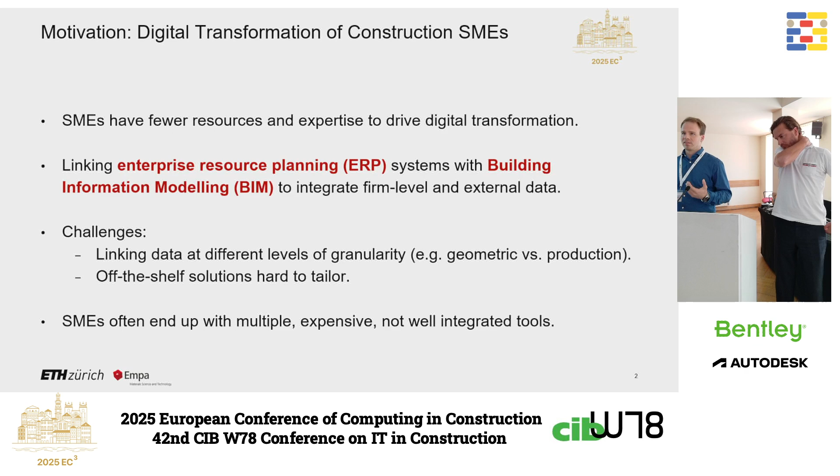And there's been some work on this, but there are still some challenges linking this data at different levels of granularity, and off-the-shelf solutions are often very hard to tailor to the custom processes of the SME. So they often end up with multiple expensive, not really well integrated tools. In this project, an Innosuisse funded project, Félix, a facade company, approached us to look into this problem and develop some solutions.

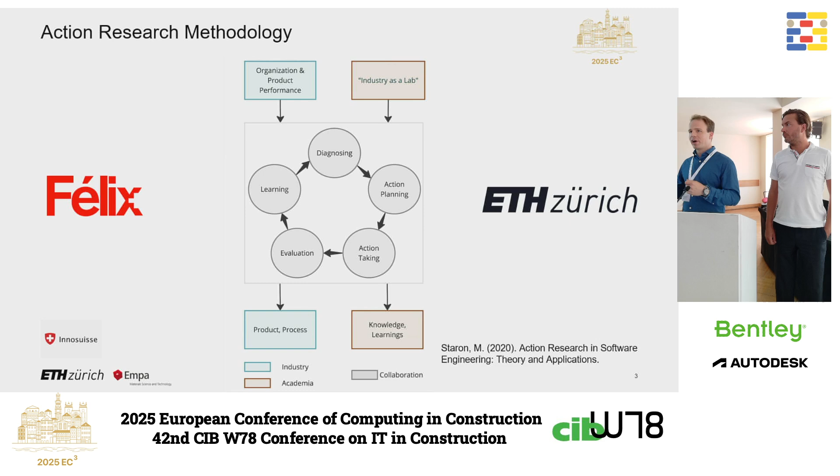And we used action research, and the paper is structured around this action research. It's co-developing a prototype together with industry, and on the side, writing on the research side, learning about that process. So exactly, as a semi-custom construction facade manufacturer, this is basically the bread and butter of Félix. These are the profile catalogs that they design, customized for each project. That's why architects like them a lot, because they can do their own special, unique design.

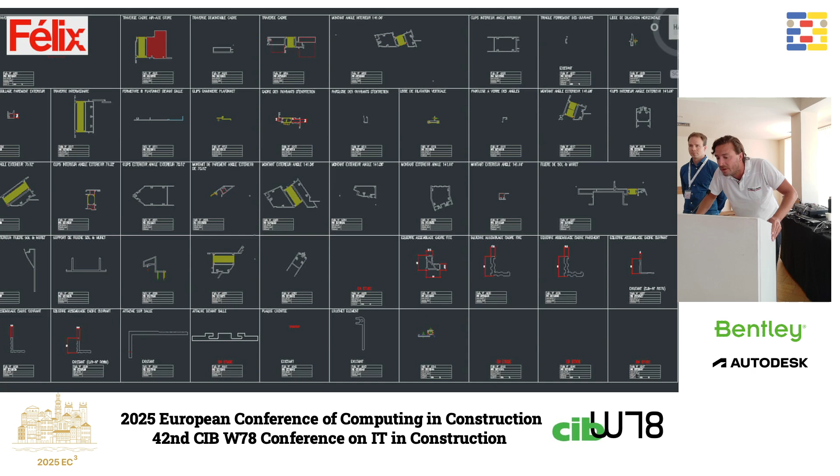But the problem when you talk about custom is that it seems very hard from an industry perspective to systemize a system. So this is basically what was done before. From bidding to design to production to installation, they needed to reproduce everything, either 2D information or 3D information. There was no digital continuity within the system. So that's why they hired me back in the day to try to solve this.

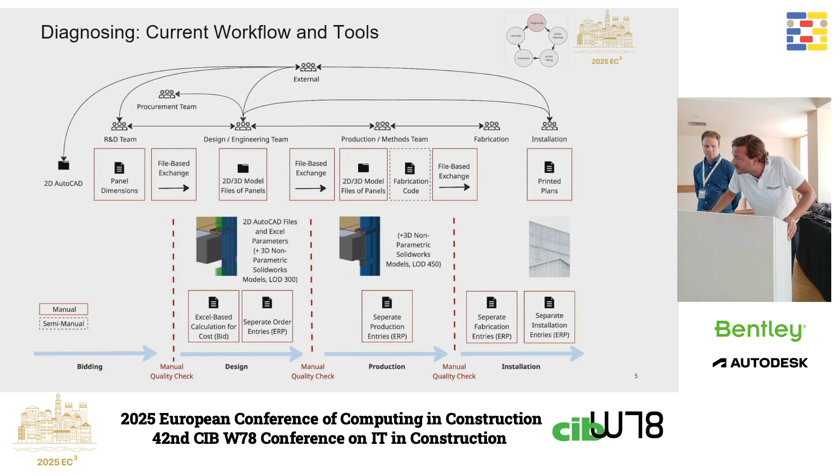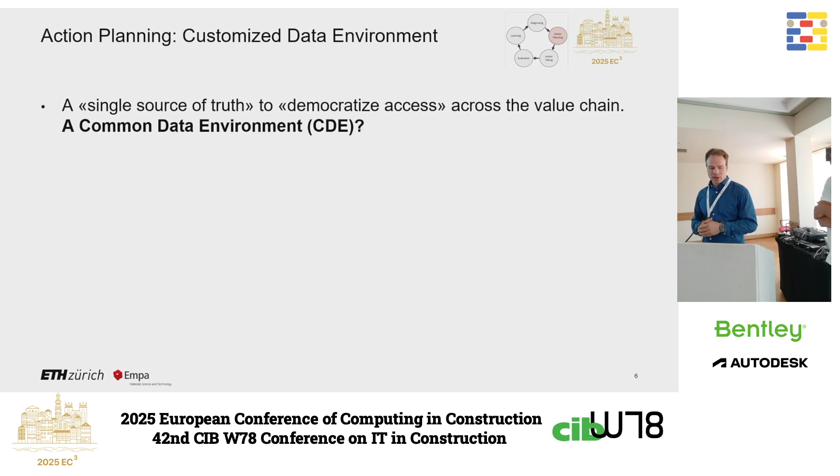So when diagnosing the problem, the wish for better data integration was mentioned. Key terms were like, we want a single source of truth, we want to democratize access over the supply value chain, and this sounds very much like a common data environment approach, but common data environments are more for cross-institutional collaboration and data exchange. So we inspired our solutions by these approaches, and we called it a customized data environment, for lack of a better name for this intermediary solution, right?

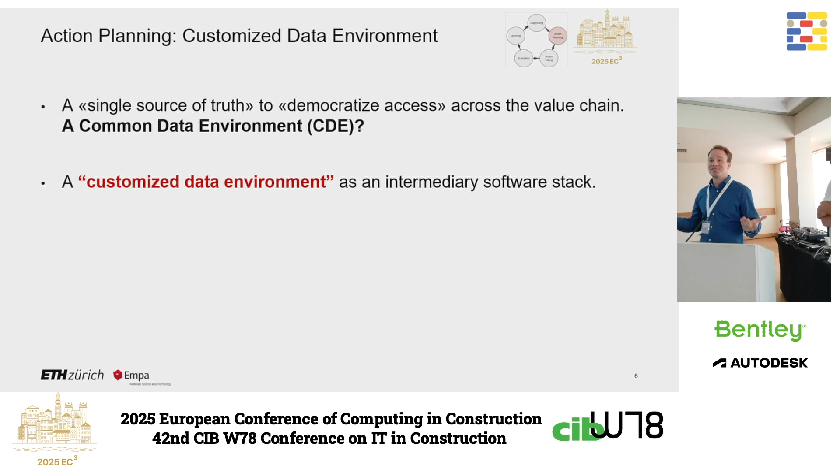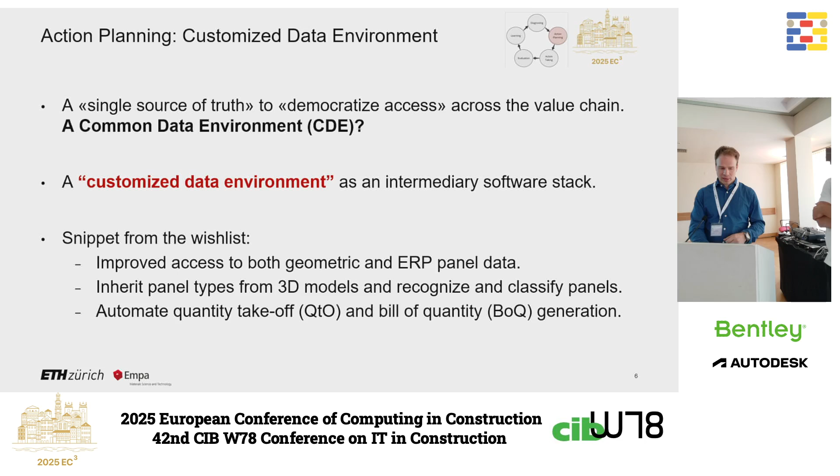And basically we tried to implement some of their wish list, importing geometric and ERP data, and for example, exporting automated quantity takeoffs of the panels and so forth. The development of the prototype, the technical part, is actually not given that much emphasis in the paper, but the high-level technical architecture is a web-based platform, so they can log in and access the different control components.

It was a very modular architecture, and on the back end we connected to the ERP and the Autodesk platform, at the time called Autodesk Forge, for geometry visualization, and then we had a database that stored user access permissions, the semantics related to the data, and the unique object identifier linking the different models.

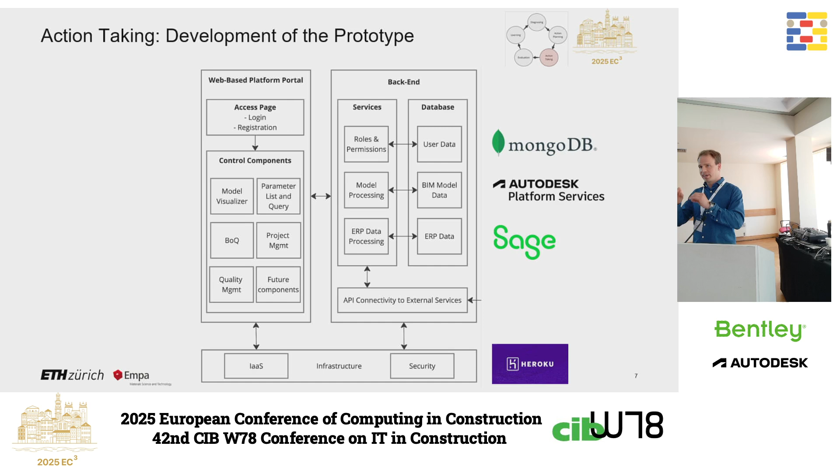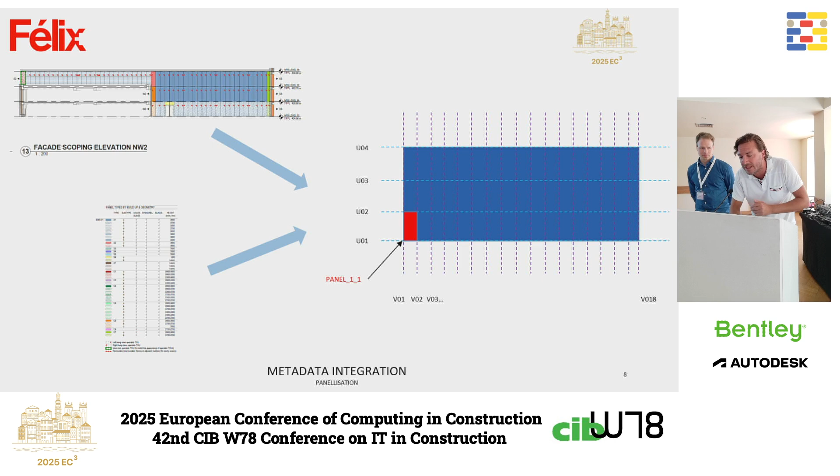So yeah, when you talk about facade generation or systemization, how do you do it? You basically do your facade elevations, east, west, north, south, and you find a way to classify them, unitize them, from U1 to UX in the vertical, and horizontally V1 to VX from left to right. This looks very easy, but you always need to standardize stuff. And this is then what you do when you are using these panels without thickness as a placeholder.

Because what you need to do is basically quality control of what metadata sits within these panels, right? Where you have obviously on one side quantitative data, which is inheriting from the 3D models, and qualitative data, which is what enables you to then get the proper details for the future panels.

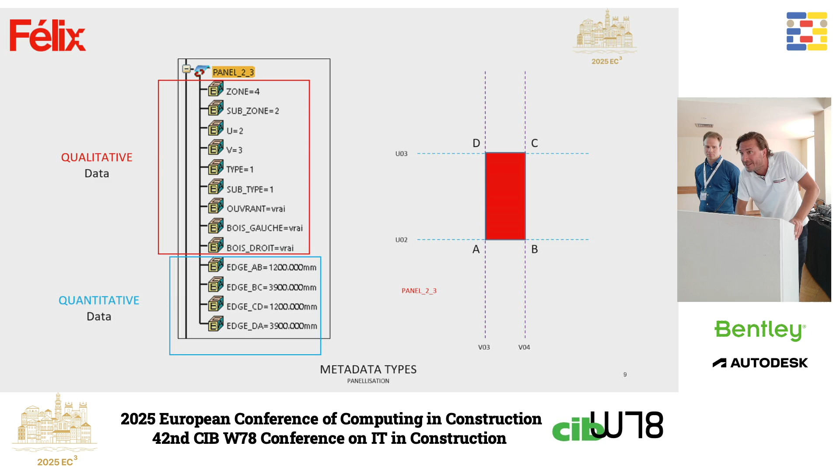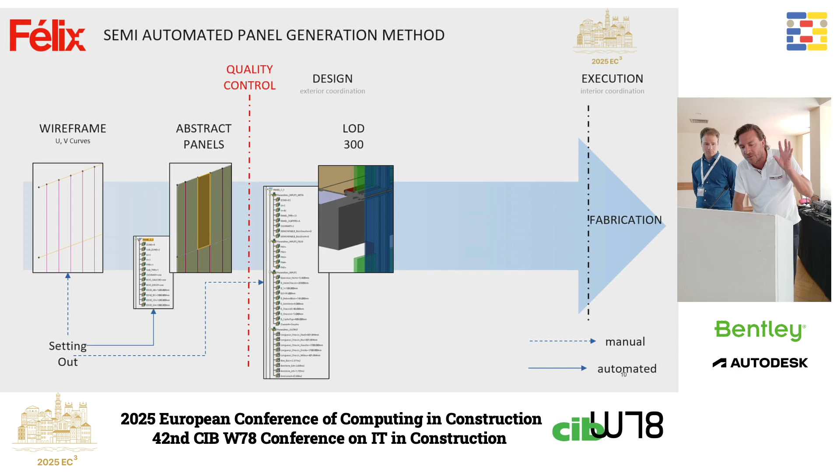So this is, from design to execution, you start with this wireframe, which is the setting out drawings that you get from the architect, then the abstract panels, these placeholders I mentioned before. And this is basically what we had for the CDE, right? So that CDE was just right there. Jens will present it in a little more detail after. And then eventually it goes from LOD 300 to give to the architects for coordination, and LOD 450 or 500 for execution, right? So that was basically a CATIA-based workflow.

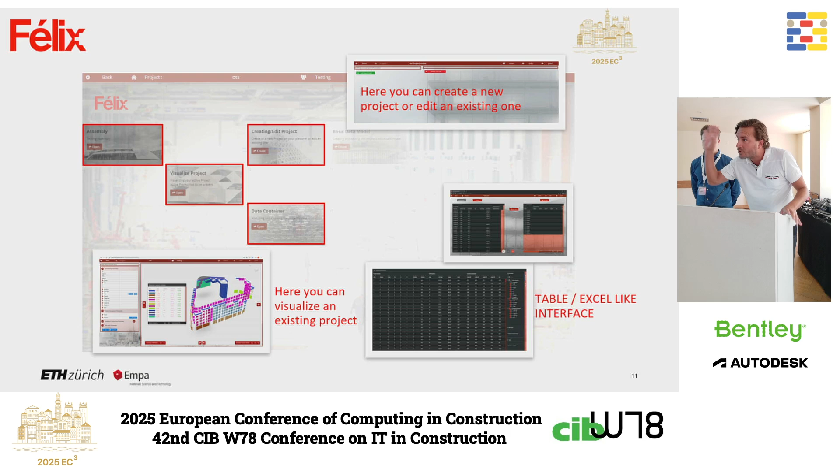And this is the platform we envisioned, with one database that enables users to use it from a 2D/3D perspective as designers, but also from a tables perspective. Jens will talk about this more in detail.

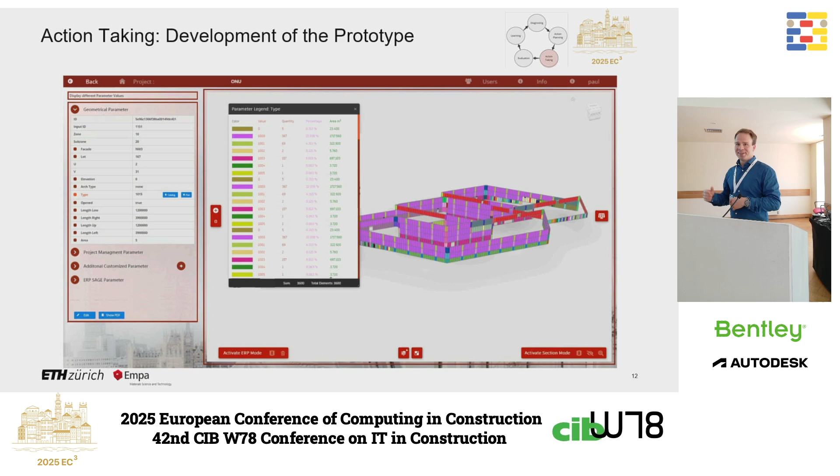Yeah, so the main purpose of this prototype was not to link directly the different other digital tools that they used, but it was more an intermediary platform that helped visualize in an easier way the data also to the production people or the ERP people. And for that, they could load these models with these abstracted panels, and they could color them according to different metadata, related to production, related to their size, and they could filter them, they could export Excel lists based on them. And this sounds very simple, but it really helped them streamline the process.

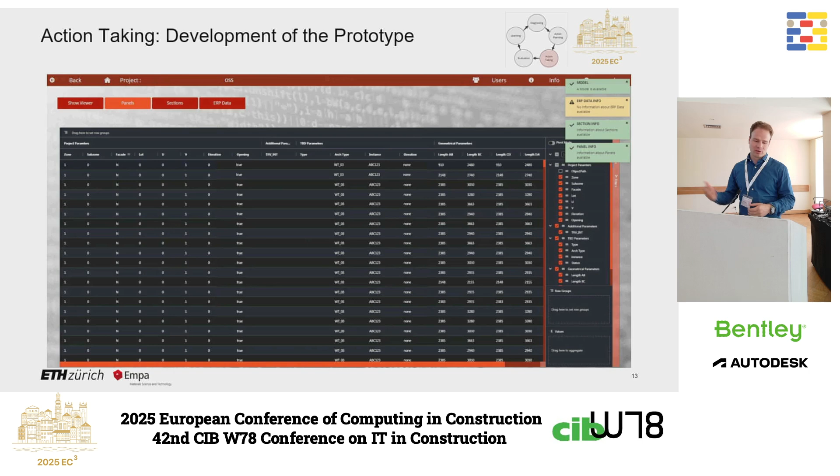And then on the other hand, you had this table-like environment where they could query the database, they could filter it, and they could also export the data. And this really helped the people more used to the Excel workflow and the ERP workflow to interact with the data as well. So it enabled the more visual people in the organization and also the more production-related people. So absolutely, the most important was obviously to get everybody on board.

And I think this is what we are trying to describe here, is that it started with design and fabrication constraints, and we eventually have been able to bring the CDE on site. You have no idea how much, as a facade manufacturer, you will need to bill the client, because you don't even know which panel is already delivered or installed or validated. So thanks to that, we could actually have a direct link with the client saying, like, this is what we already delivered, you have to pay us, basically.

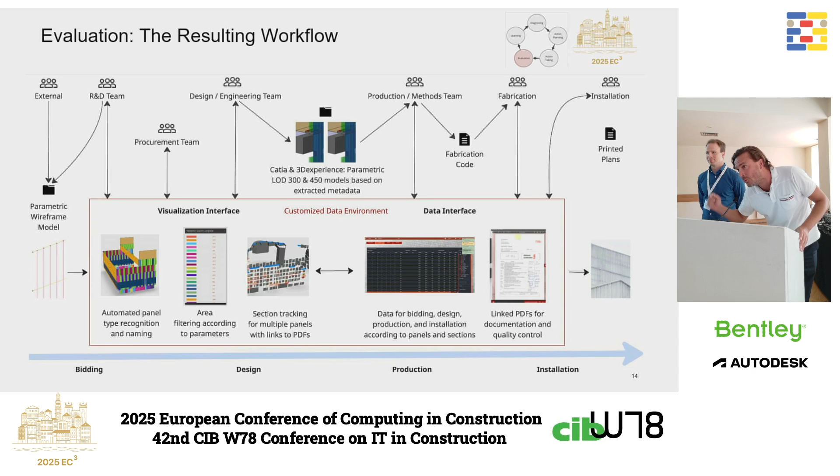Yeah, the simple property of accessing the plans and the simple geometric model on site to better understand what panel they are holding at the moment made a big difference.

So it's a bit provocative, but we think for internal SME processes, such a customized environment approach seems very modular, low cost. It can be easily targeted to their internal processes. And it's not the goal to replace all the other tools, but it may enable the link between the different people in the organization that want to work with that data.

And the prototype was developed, but it's still basic. I think the geometric functionality could be enhanced. It wasn't able to modify the geometry inside. It was just importing it and then exporting it again. There can be also more advanced data management. You are all more expert on that.

And of course, it needs to be validated whether this also works for other SME processes. But I think we found this approach worth sharing. Maybe it inspires you working on this to also think about similar solutions. Oh yeah, there is still the Autodesk plugin, and this could, for example, also be replaced with COMPAS, an open source viewer we developed at ETH. So you could remove all third-party dependencies and have just a custom solution.